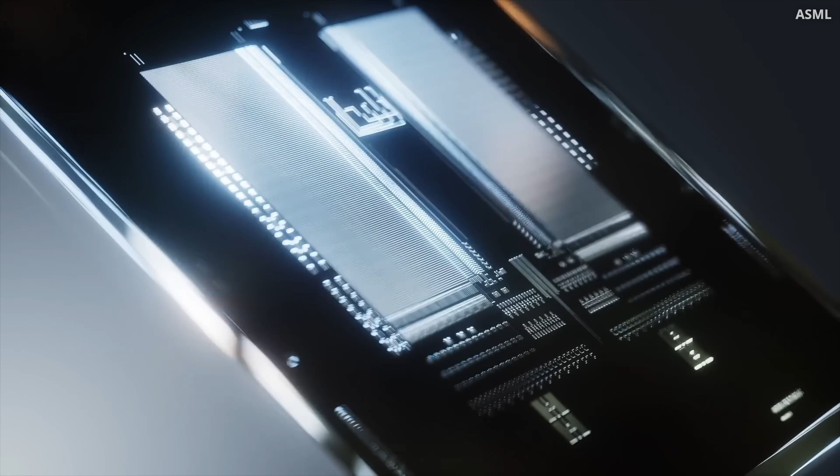There is a tectonic shift underway in chip making. One so big, it's not just about factories. It's about who controls the global economy itself. Let me show you. Just a few years ago, the Arizona desert was nothing but dust. Fast forward to today, and the same land holds America's most ambitious project.

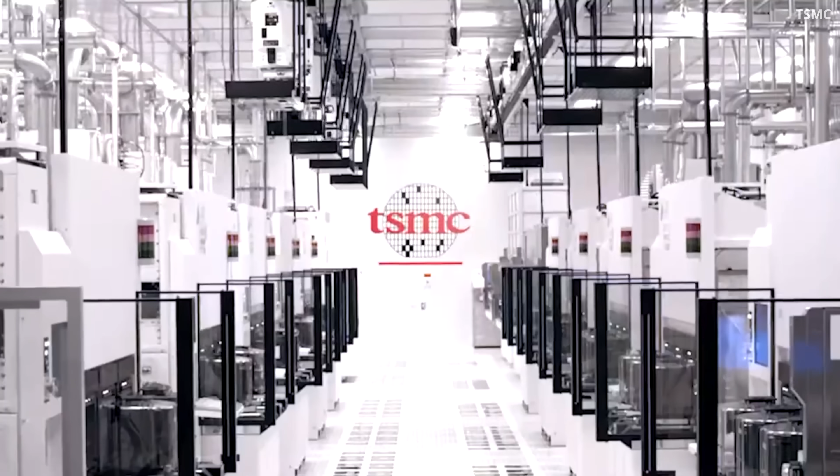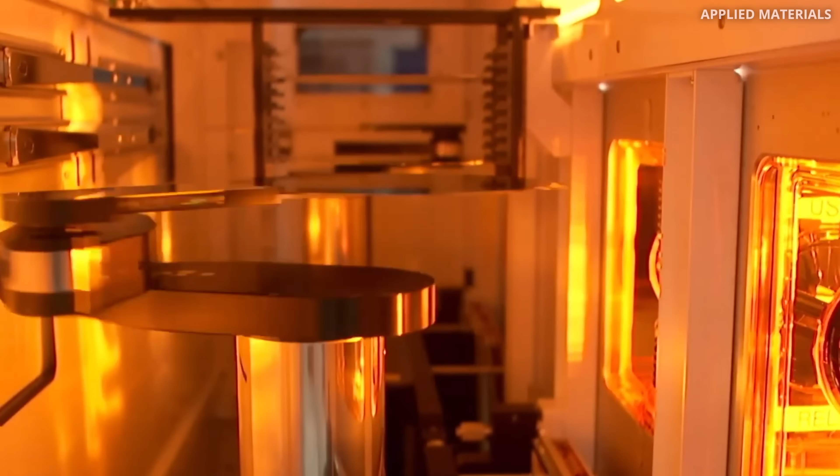TSMC's most advanced chip factory. A $165 billion bet on the future of microchips. There is a reason why TSMC chose Arizona. The desert offers one advantage Taiwan can't match: almost zero risk of natural disaster. And that stability matters when the stakes are that high.

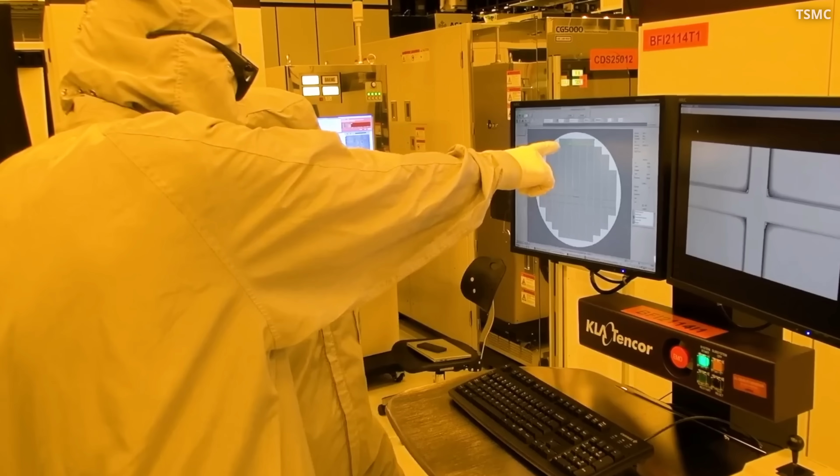The plan sounded simple. Just copy a semiconductor fab from Taiwan onto US soil. But this turned out to be way harder than anyone ever expected. In Arizona, TSMC ran straight into a sandstorm of problems. Because chip making at the nanometer scale isn't about construction. It's choreography: equipment, chemicals, and people moving in perfect lockstep. Get it right, and you are printing money. Miss just one step, and billions go up in smoke.

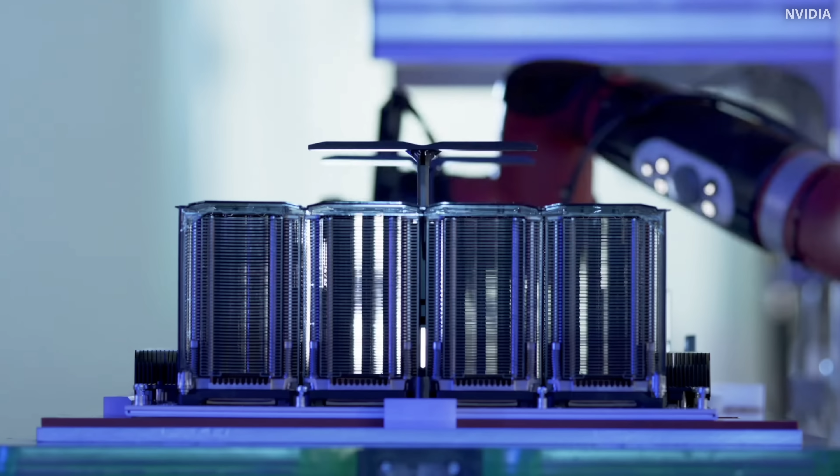And here is the irony. The US invented the semiconductor industry and still leads in design, equipment, and software for chip design. But manufacturing dominance slipped away. US share of chips fell from 40% in 1990 to about 10% today. Can TSMC bring advanced chip making back to the US?

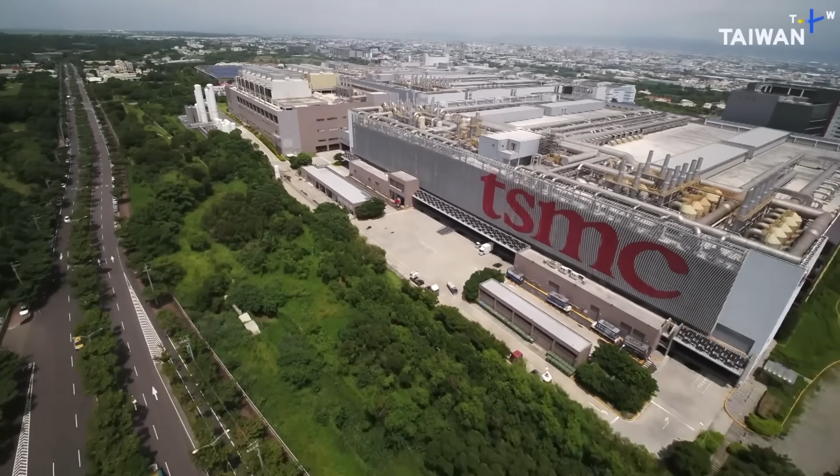On paper, the plan is simple. In reality, it's brutal. In Taiwan, TSMC can build a fab in just 2 years. In Arizona, every single step took at least twice as long. So, what happened? I've been working in the semiconductor industry for the last 10 years. And my main lesson is chip making is the art of killing variables.

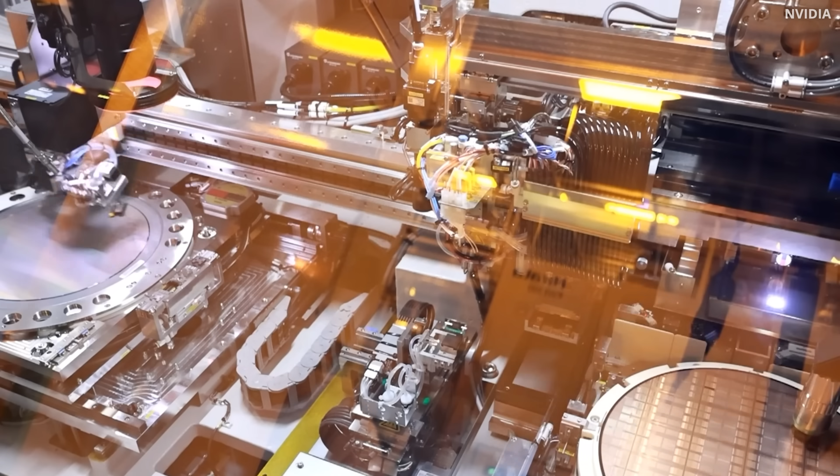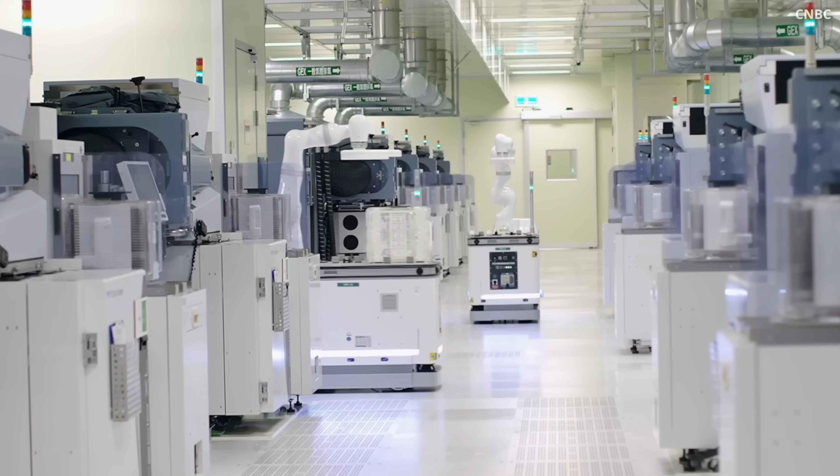Now, consider this. At the 4-nanometer process, there are hundreds of variables spread across 4,000 manufacturing steps. And here is the catch. Any of them can kill a chip. And variables don't behave the same in every place. In Taiwan, TSMC tuned the recipe for local water, air, power, suppliers, and even culture. Move the fab to Arizona, and all these variables shift.

Arizona is not known for water. Air is different, and most important, the culture is very different. Even the ground is different. Here, the ground is much drier, with rock-hard layers beneath. That gives it a higher natural frequency. Any of those shifts can throw off nanoscale precision, which is enough to kill an entire chip. Now multiply that across thousands of wafers, and suddenly production yield drops.

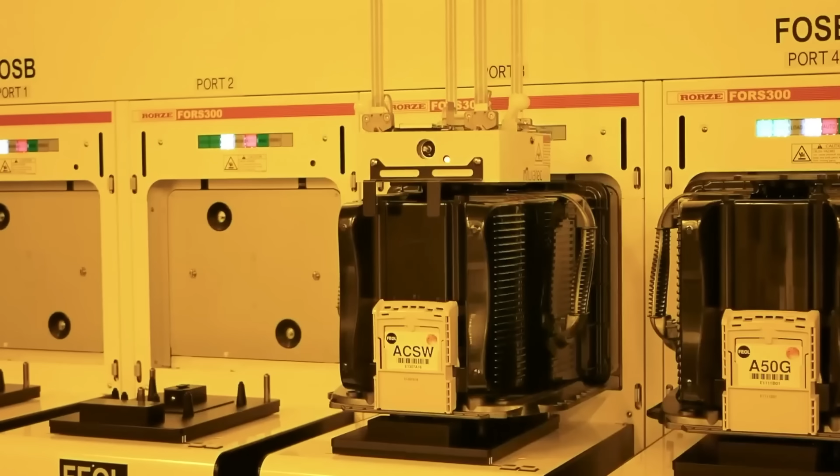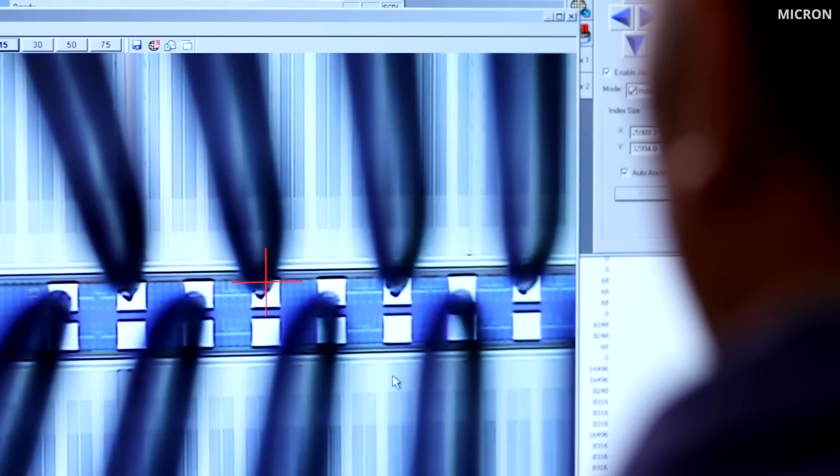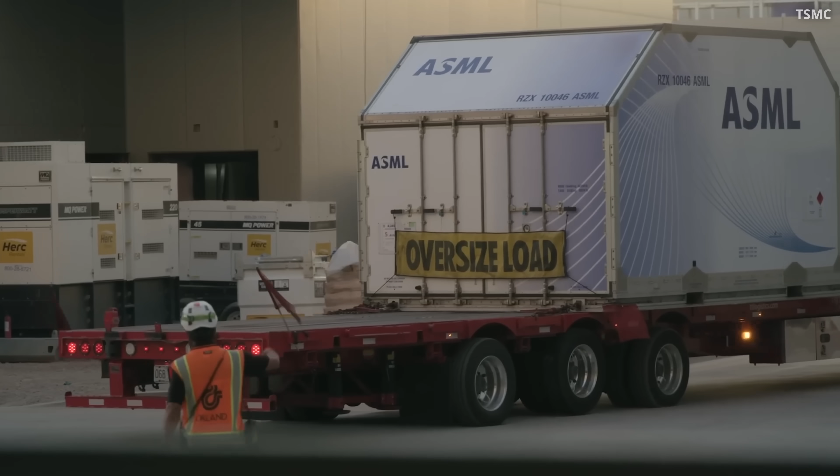Yield is critical. It's the percentage of chips per wafer that actually function. At 90% yield, like TSMC achieves in Taiwan, you're practically minting money. At 30%, you're bleeding cash. But in Arizona, instead of glory, there was chaos. Variables drifted. Dust storms breached clean rooms. Every system was pushed to its limits. Yield collapsed. The truth is, you can ship in equipment. You can even fly in engineers from Taiwan, but you cannot ship the context.

And here is a hidden truth. Each time you want to build a semiconductor factory, you're not just building one. In fact, you have to build 4 factories, 4 invisible factories inside. The first invisible factory inside the factory is the water plant. And in the desert, this is the hardest battle of all. You might be surprised, but at the bleeding edge, water matters as much as the famous EUV lithography machines. And that's the problem, because semiconductor manufacturing uses a lot of water.

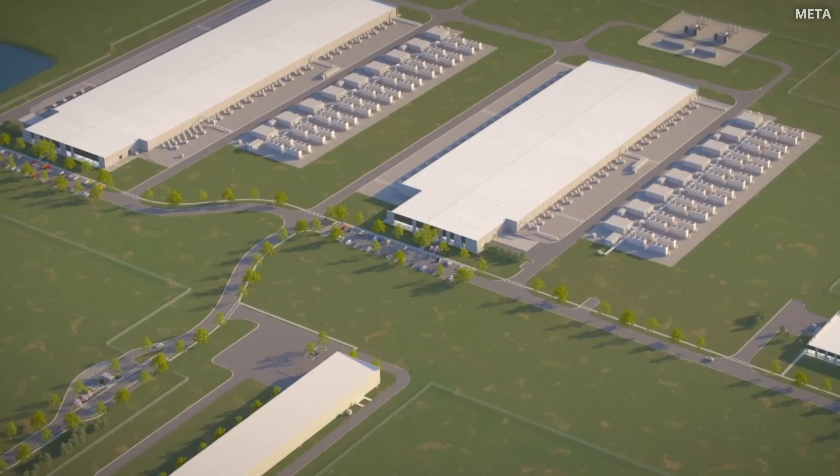While Arizona is one of the most water-stressed places on Earth, the state depends on the Colorado River, which is already stretched to its limit. At the same time, Arizona hosts more than 100 active data centers. And this includes massive data centers run by hyperscalers like Meta and Microsoft. These facilities consume enormous amounts of water for cooling.

The irony is brutal. Those same data centers burn a lot of energy, and power plants again use water to generate this energy. That electricity turns into heat inside the servers, which then require even more water to cool them. It's a feedback loop with heavy consequences. As you can see, the water situation there is already a nightmare. And now this new fab will attempt to draw on the same finite supply.

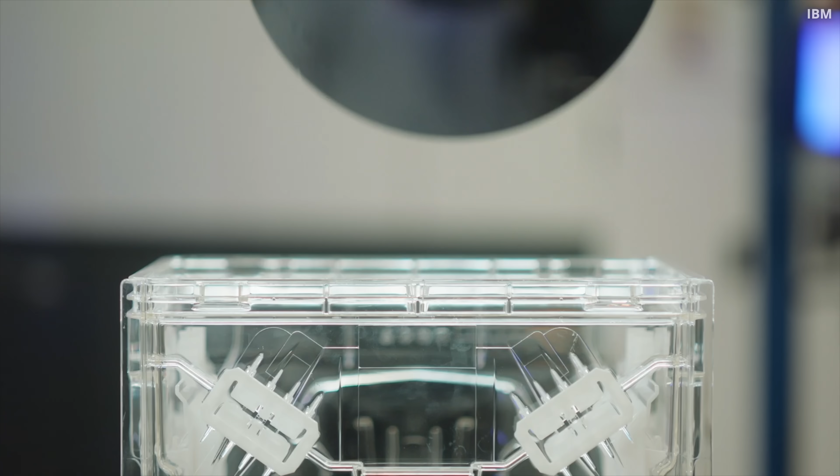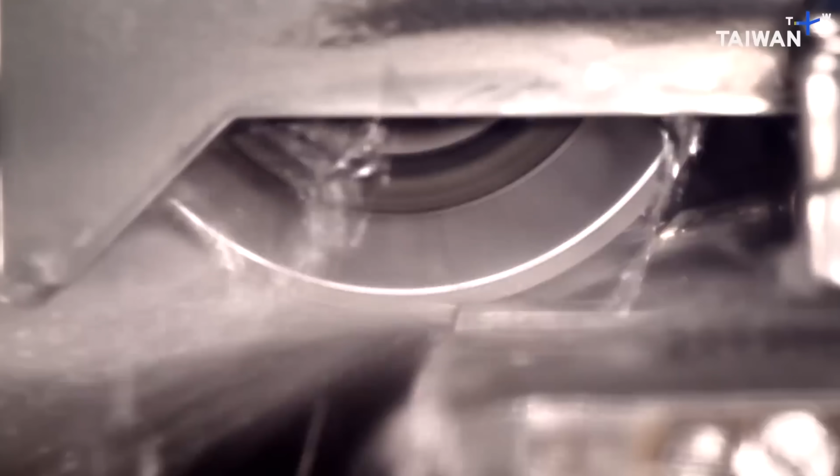But a semiconductor fab is not just thirsty for large quantities of water. It requires ultra-pure water. That's 1,000 times cleaner than drinking water, and even cleaner than the one used in medical injections. Because a single contaminant or particle can destroy a $30,000 wafer. Water is the backbone of semiconductor manufacturing. It touches nearly every step of the process. After etching, it rinses away acids. After photoresist, it strips away chemicals. Just imagine, even in immersion lithography, water sits between the lens and wafer, sharpening the image.

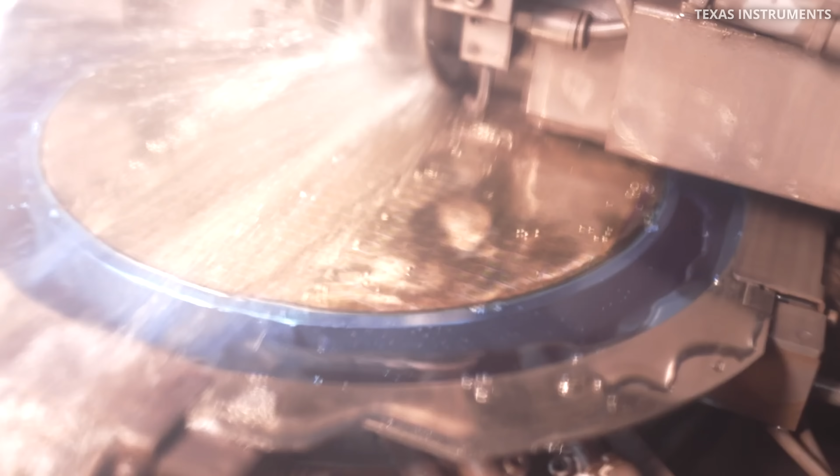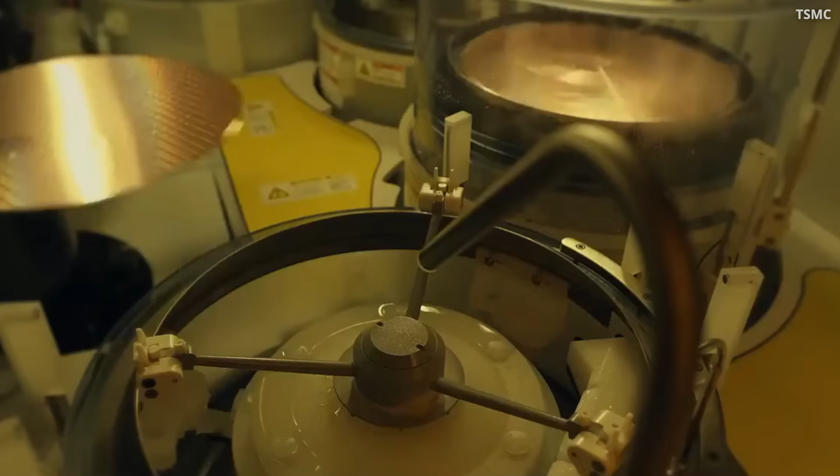And the amount of water used is quite shocking. Each and every silicon wafer drinks around 2,000 gallons of water across its lifetime. This means Fab 21 alone will consume more than 4 million gallons. That's about 6 Olympic swimming pools of water per day. In Taiwan, TSMC cracked this by building dedicated water plants, purifying and recycling every possible drop. But in Arizona, water is different, chemically different. It's full of magnesium and calcium. You can't just copy-paste the solution from Taiwan.

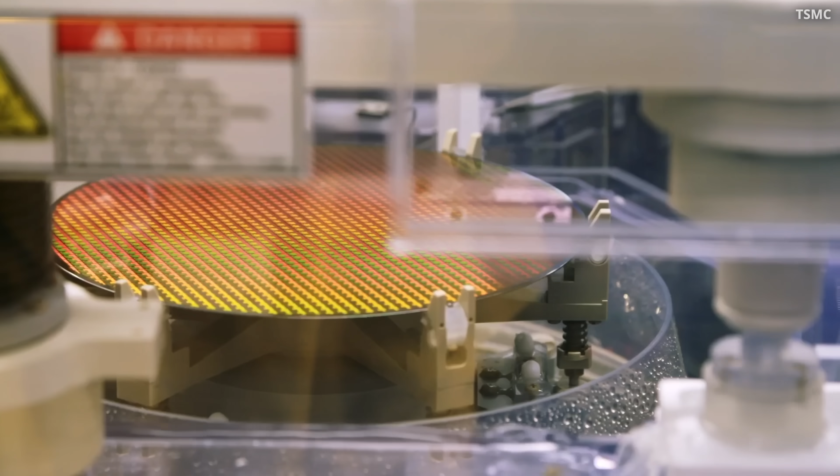So, how do you get that much pure water in the middle of the desert? The answer is hard. You don't just build a semiconductor fab. You have to build a dedicated water plant the size of a stadium. Inside, water flows through stage after stage: filtration, reverse osmosis, and deionization.

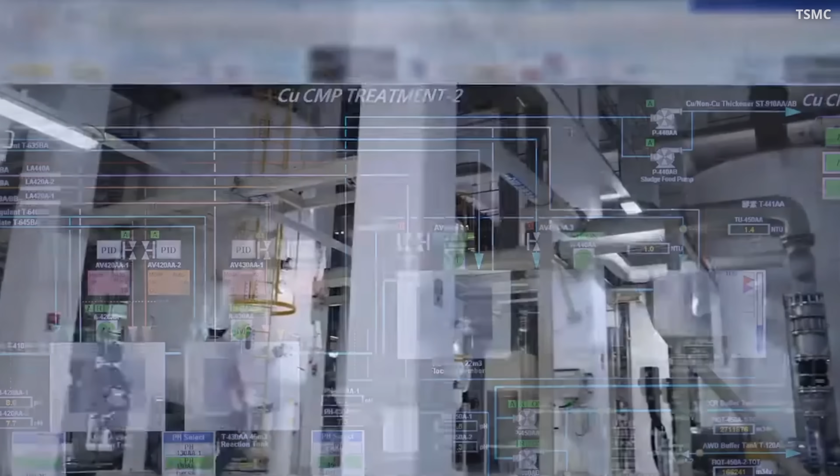And even after all of that, tiny impurities still remain. Then comes the final polishing. Resins and ultrafilters scrub out the last traces, leaving water so pure it exists only in a semiconductor fab. And TSMC had to rebuild this entire system for the unique chemistry of Arizona's water. What comes out is the purest water on Earth.

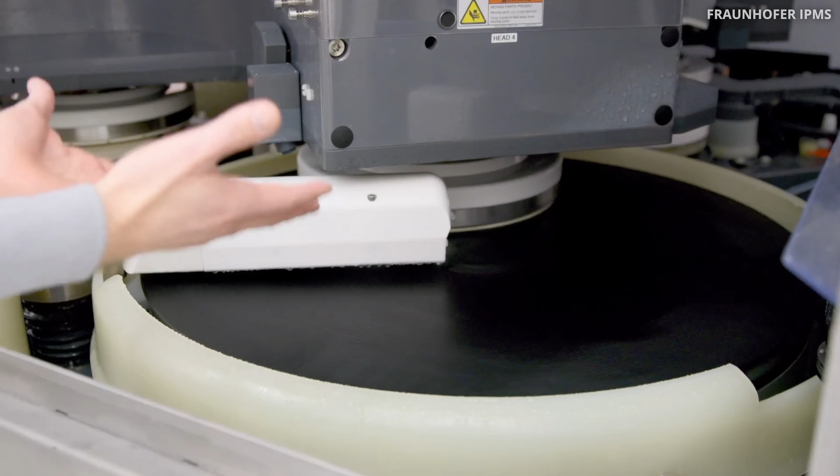And the genius of the water fab is that instead of dumping waste, the plant recycles it, making sure their hard-earned investment doesn't go down the drain. Literally. If, for some reason, it can't be reused again, it gets redirected into cooling. That's how Fab 21 reduces its draw on city water, while still feeding one of the most water-hungry fabs on the planet. Soon they realized water wasn't enough.

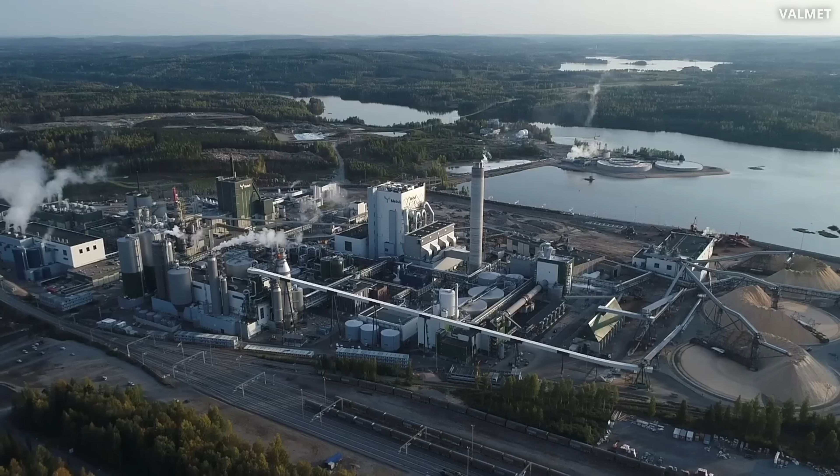Another critical cleanser in chip making is sulfuric acid, the quiet backbone of the fab. It strips photoresist, clears residues, and burns away any trace of contamination, so the next layer can stick. It's not glamorous, but without sulfuric acid, the fab stops cold. And not just any acid will do. Again, it has to be ultra pure.

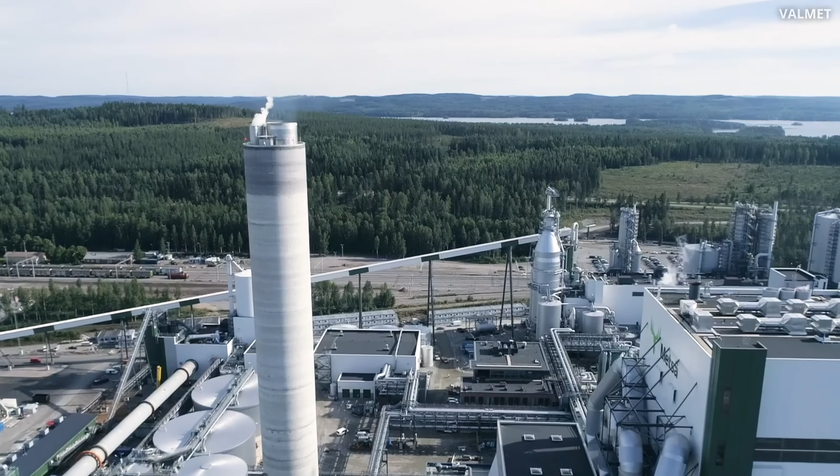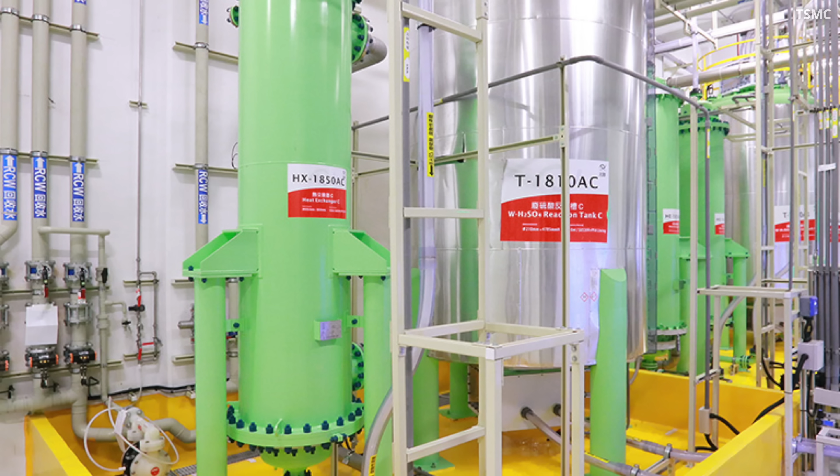And that's where Arizona hit the wall. US vendors were able to make clean acid, but local prices were nearly 5 times higher than in Taiwan. So TSMC had to ship it 6,500 miles from Taiwan. And as crazy as it sounds, it was still cheaper and more reliable than buying locally. Of course, that couldn't last forever. So the supply chain followed.

Sunlit, a Taiwanese chemical giant and one of the key TSMC partners, had to build a new plant in Phoenix. Again, not a copy-paste factory, but one attuned to Arizona-specific water and desert conditions. And that move was critical, because copying a fab means copying its suppliers too, and planting them next door.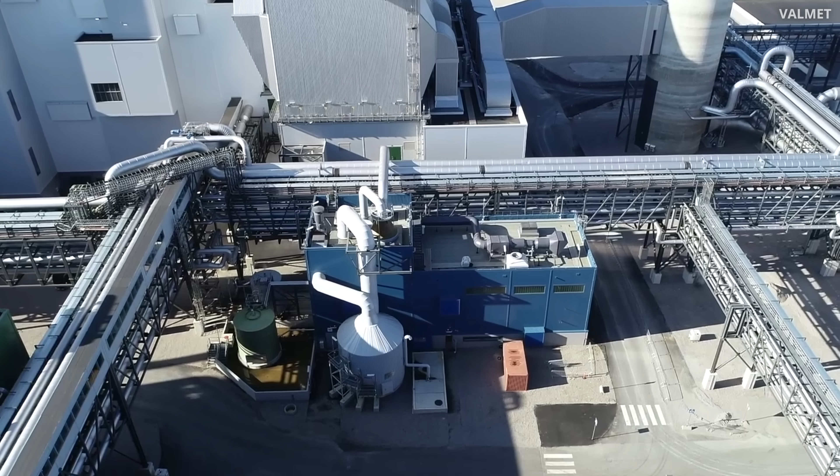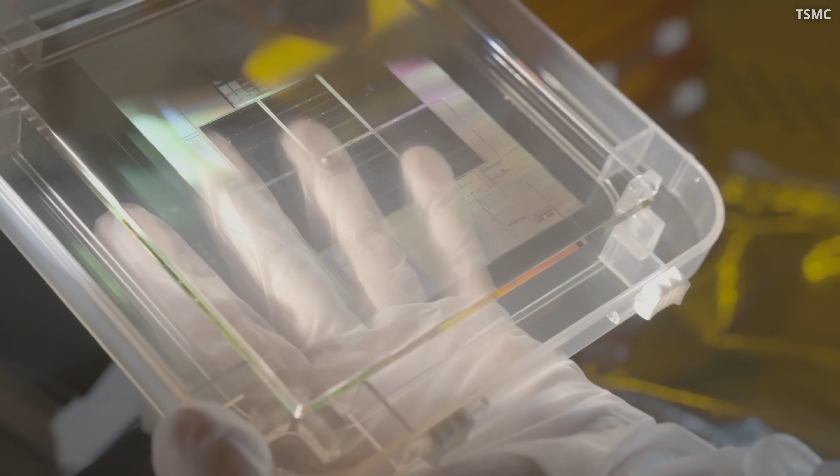If acid is a backbone, then gases are the lifeline of a fab. And not just oxygen or nitrogen, but gases like neon, rare and tough to source at the ultra-high purity chip making needs. Neon is critical for the lasers used in photolithography. It makes up about 95% of the gas mix inside deep ultraviolet tools that print chip patterns. EUV handles the most critical layers, but DUV still prints most of the stack. The fact is, DUV can't run without neon.

The catch here is, again, it has to be ultra pure. I know I said it already 3 times, but that's the truth of chip making. Everything has to be cleaner than clean. Even a trace of impurity destabilizes the laser, blurs the light, and seeds tiny defects that collapse the yield.

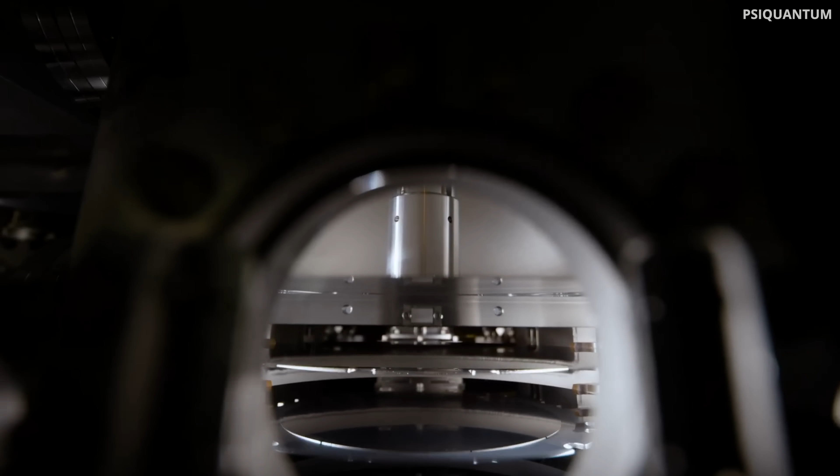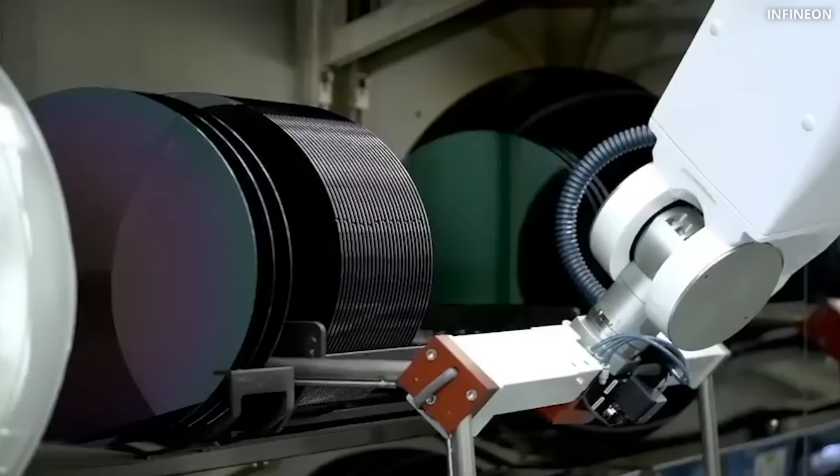And again, Arizona comes up empty. No local supply. For now, only a few essential gases used in chip making are produced locally in Fab 21. But most of these specialty gases are still imported from Taiwan, Japan, and Europe. That's the fragile truth. And even the silicon wafers themselves are still shipped from Taiwan and Japan. So, from the outside, Fab 21 looks American. But under the hood, it's still tied to a supply chain stretching thousands of miles across the oceans.

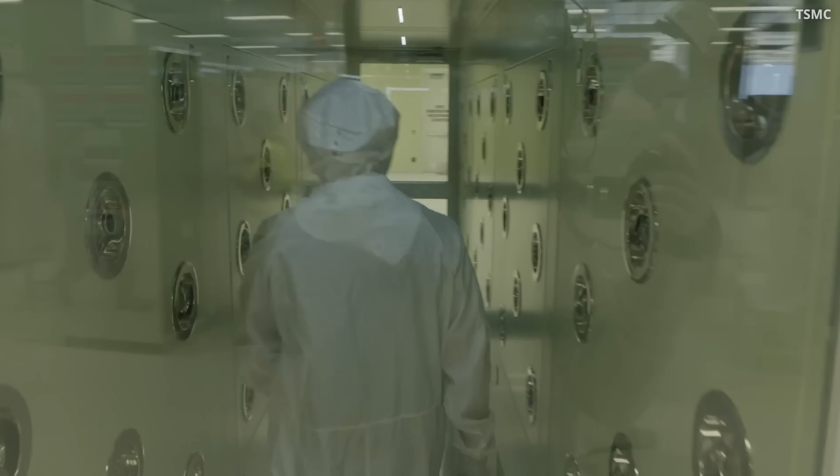Water is one challenge, but what about air? You might think, surely, Arizona has plenty of air, right? But that's the most fragile ingredient in the recipe. And once you get into a semiconductor fab, you will immediately realize why.

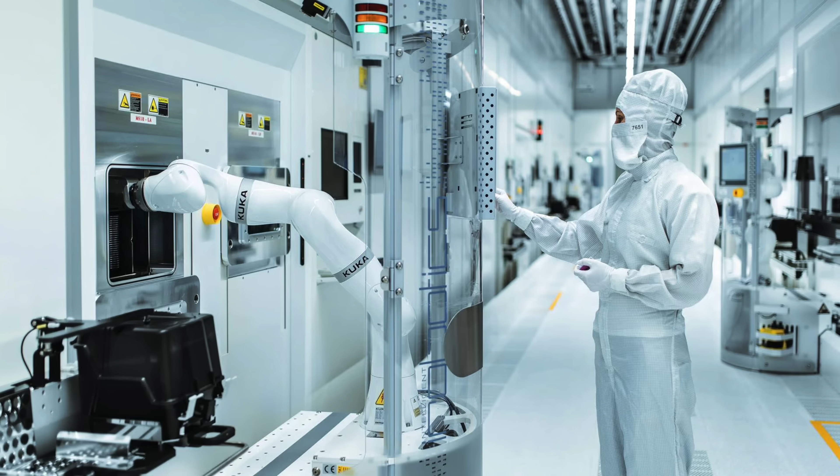Back when I was doing my master thesis, approximately a decade ago, I used to go inside the fab, inside the clean room, because there was something wrong going on with my chip and I had to go and watch the whole process to figure out what's going on. That's when I first saw how extreme these environments are, because the obsession with cleanliness is beyond imagination.

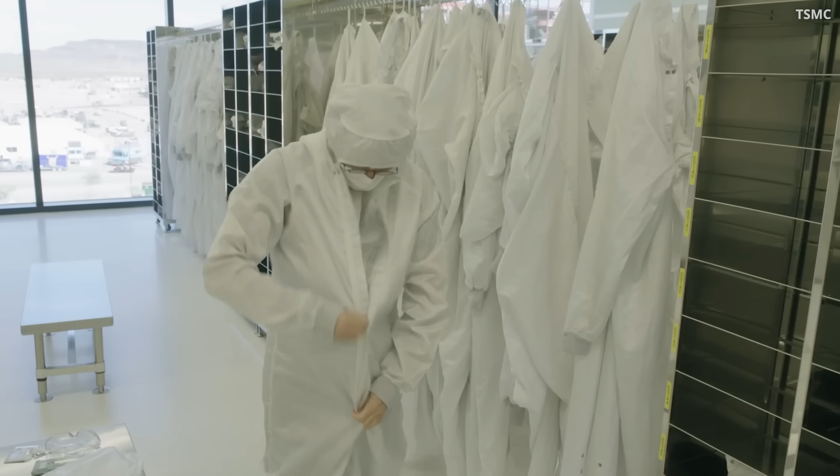Basically, you are wrapped head to toe in a clean room suit. The rules are absolute. Nothing escapes your body into the air. Even a single eyelash drifting onto a wafer can destroy weeks of progress. Clean rooms are the place where the chips really get their crunch.

Fab 21's clean room is enormous, about 160,000 square meters or up to 1.7 million square feet. By size alone, it ranks among the largest clean rooms ever built. But the bigger the room, the harder it is to keep it pure. And the Arizona desert makes it even tougher.

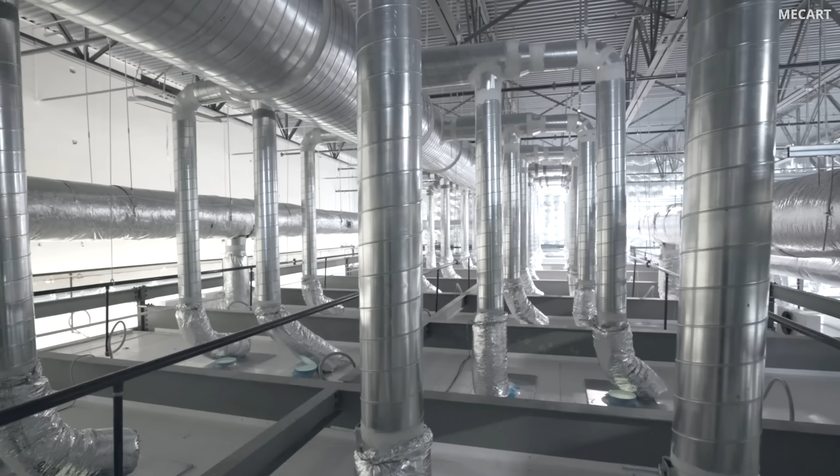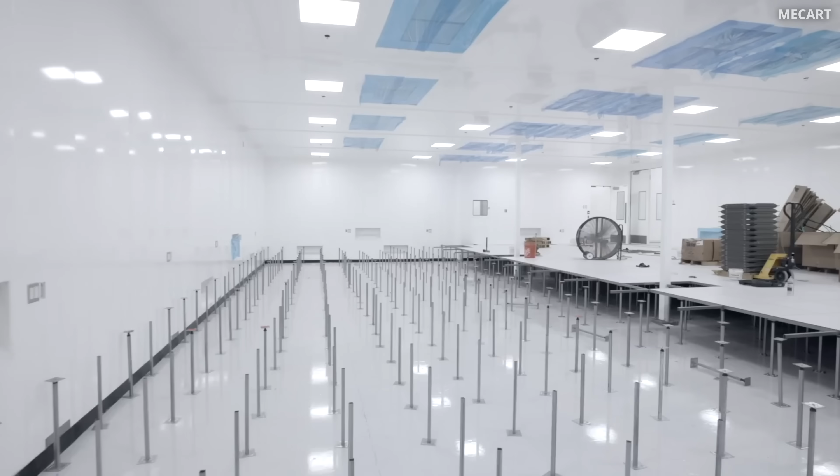Clean air is constantly pushed from the ceiling, flowing smoothly over the machines, then slipping through vents in the floor. And it's all about pressure, because the air pressure inside the clean room is kept slightly higher than outside. Dust and particles from the desert can never be permitted to leak in. TSMC flew in teams from Taiwan to fine-tune airflow until it was perfect.

Just imagine, outside there are thousands of particles, while inside the fab, inside the clean room, it can never rise above 10 particles per cubic meter. It's fascinating because the fab literally breathes outwards and pushes the desert away. And once the air is finally under control, the next challenge begins.

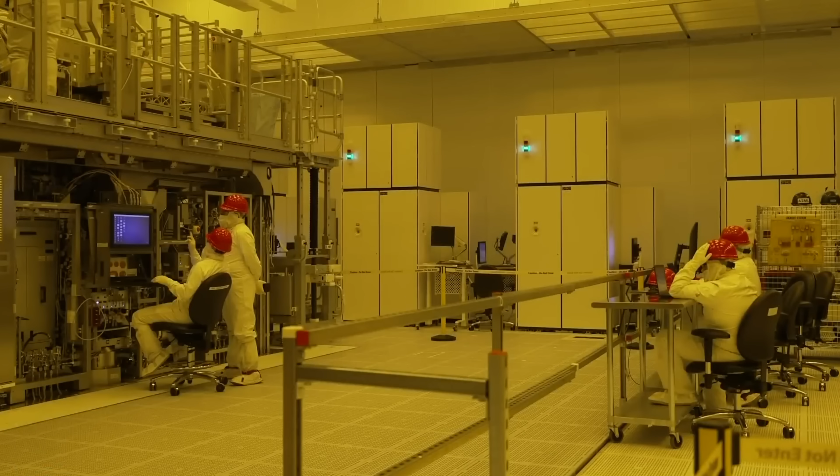The tools arrive. And this is where the real money shows up. 70% of a fab's cost isn't concrete or clean rooms. It's the machines. Billions of dollars worth of tools, packed wall to wall. And this is an area that really plays to America's strength. Companies like Applied Materials, Lam Research, and KLA cover most of the critical steps in chip making. Getting that equipment to Arizona was the easy part.

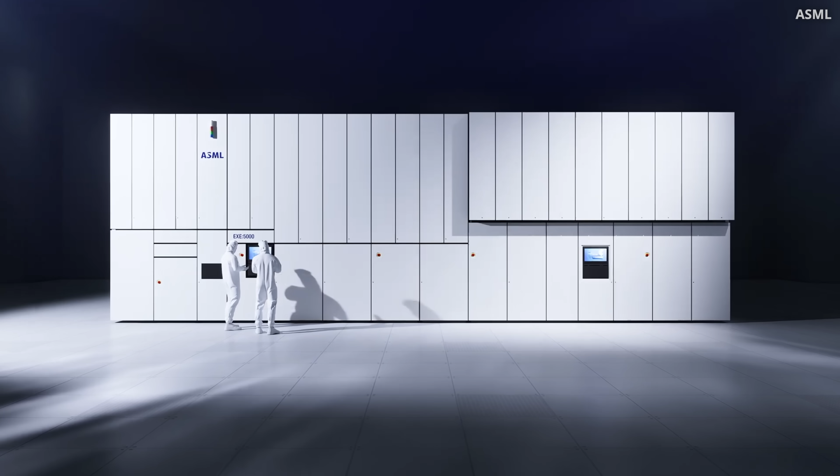But one thing the US doesn't have is lithography. The most advanced tools, EUV and DUV scanners that print chip patterns on the wafers, come from ASML in the Netherlands. Without these tools, no fab, not even TSMC, can print chips at 5, 3, or 2 nanometers. The United States leads in etch, deposition, process control, but they still have to import EUV machines from Europe.

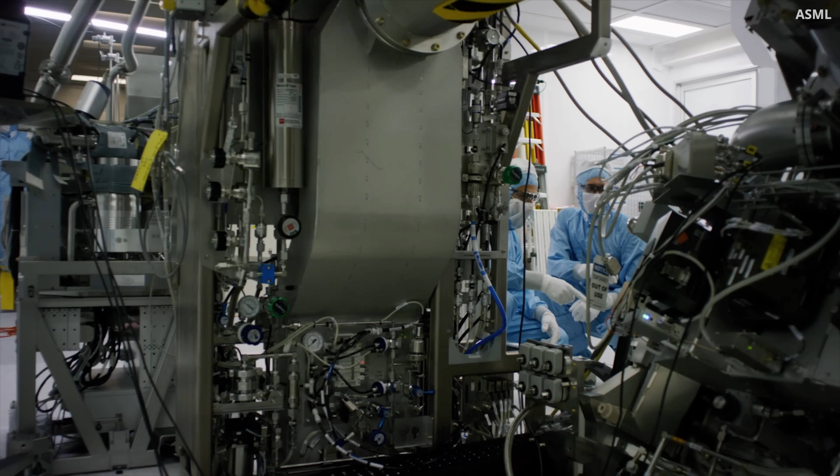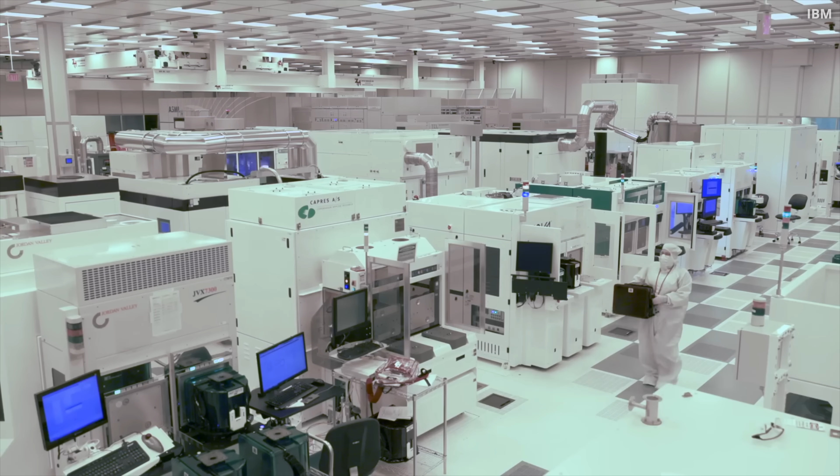Moving these machines into the fab is a stressful process, because if you tilt a component even slightly or drop a part, the precision is ruined. Importing and installing EUV machines is a stressful job. Just one mistake, and the fab goes dark before it even starts. TSMC's Fab 21 needs not one, but dozens of machines worth $150 million each just to get started.

And once it's all in place, you realize something else. Actually, building a fab was the easy part. The real challenge is what comes next. Getting these machines to work together seamlessly, flawlessly, to carve the tiniest transistor features into silicon. This is pure art. Imagine it's like conducting an orchestra where every single instrument costs $150 million and plays at the scale of atoms. Here, the real battle for yield begins, because the fab doesn't make any money before the wafer comes out clean from defects.

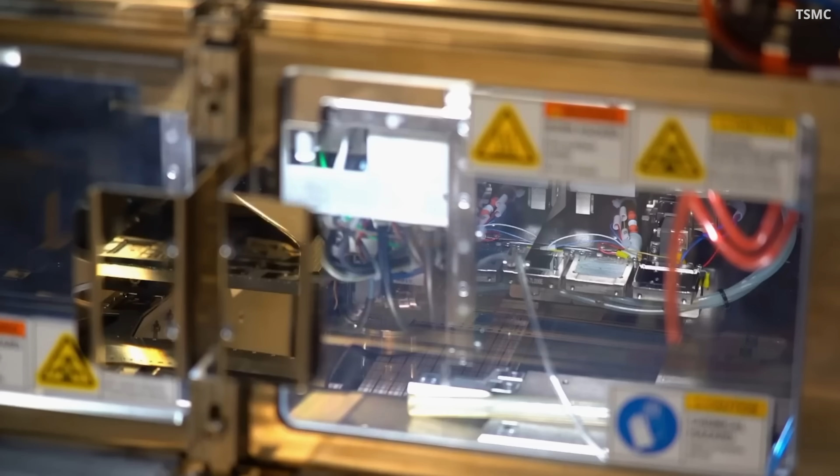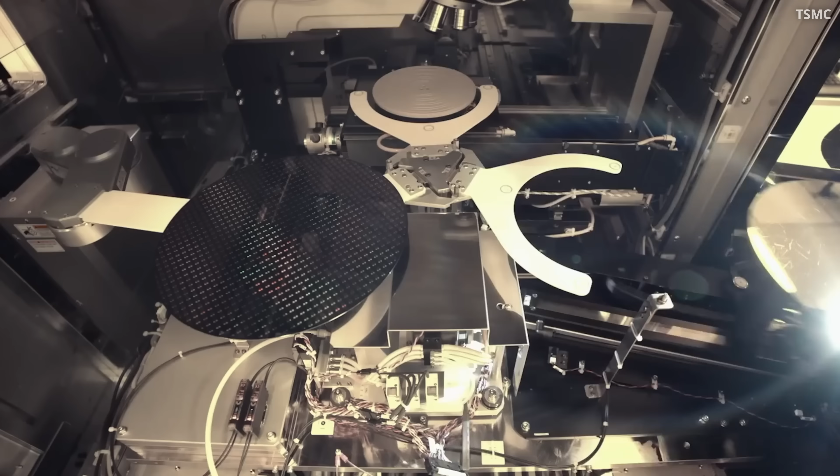And the first wafers never do. The equipment is new. The process steps are new in the new environment. So engineers, operators, and even tool vendors work together day and night, tuning, adjusting each of the 4,000 steps it takes to build a modern computer chip. And the scale is brutal. At 4 nanometers, a single wafer stacks more than 80 layers across 4,000 process steps. It takes months and thousands of tweaks before the first wafer finally comes out right.

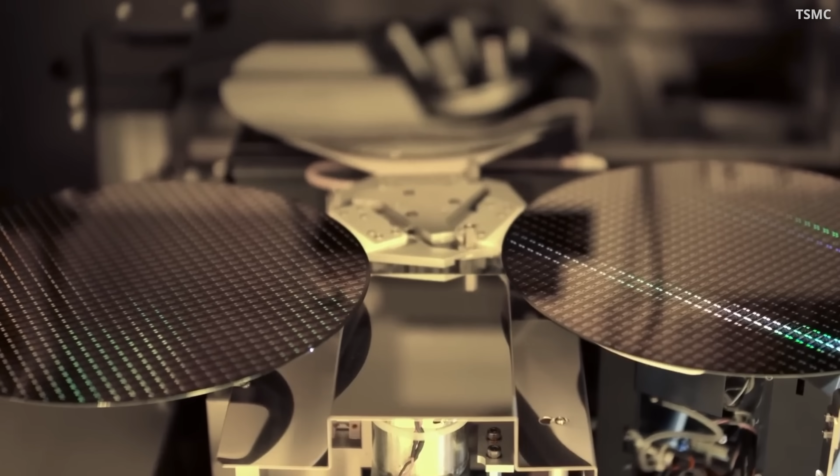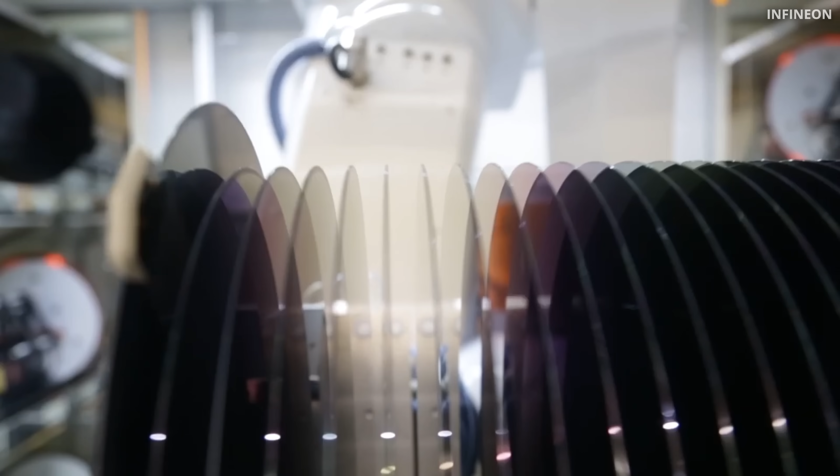This is the first 4 nanometer wafer manufactured at Fab 21 in Arizona. The most advanced silicon wafer ever made on US soil. It's progress, but that only happened after going through a lot of pain. Output is still low, covering only about 7% of the US demand. And costs in Arizona are at least 50% higher than in Taiwan. Why? Because almost all raw materials, from chemicals to wafers, are still shipped in from abroad.

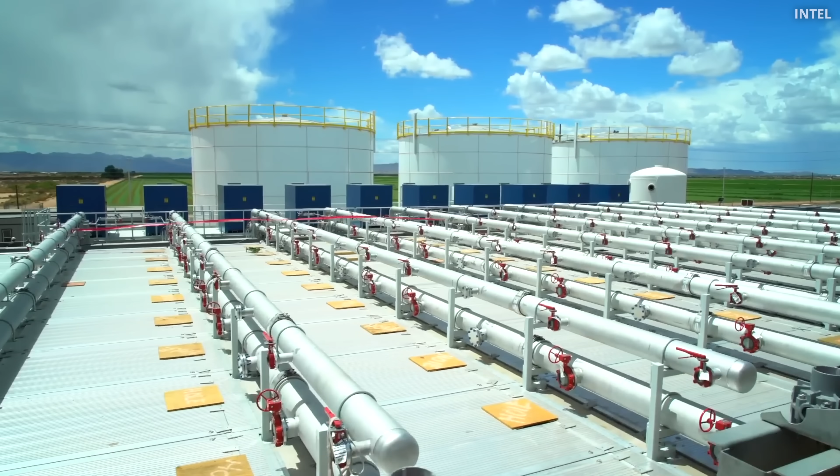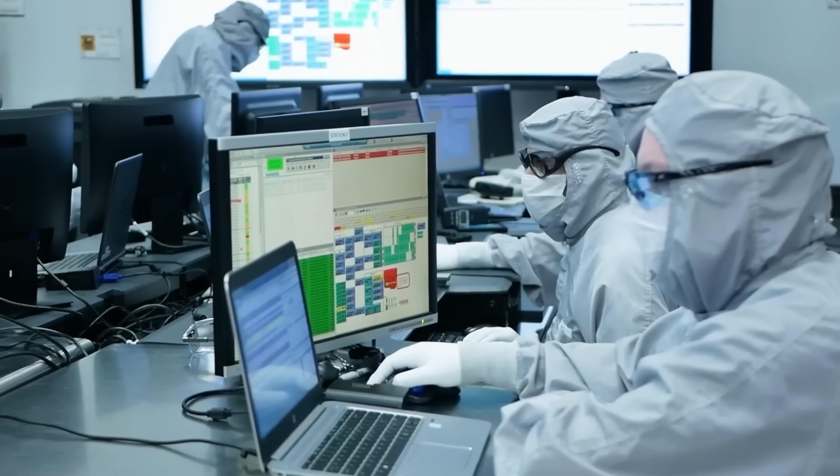And that's quite surprising, because Intel's most advanced fab, Fab 42, has been sitting just 30 minutes away for more than a decade. Yet most of its materials still come from abroad. Now, TSMC is trying to rebuild the entire supply chain here locally in Arizona. And in the desert, engineering talent is even scarcer than water. Taiwan's real advantage isn't just fabs, it's people. Generations of engineers trained in the rituals of chip making.

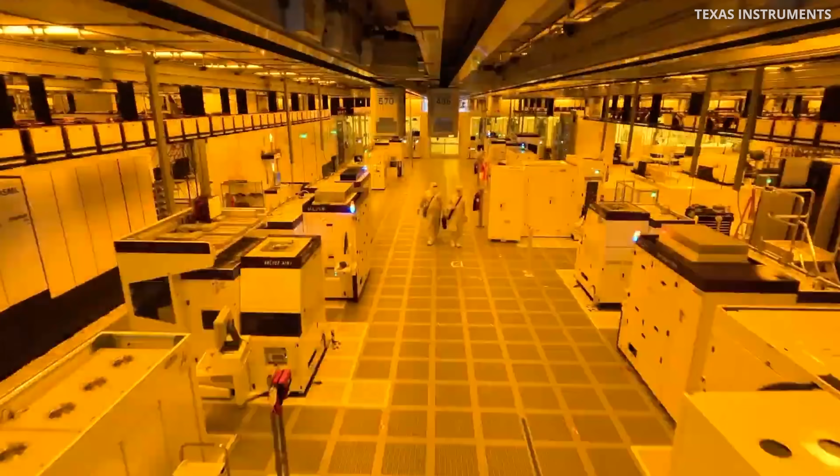But here is the harsh truth. Why it is in fact so hard to build a semiconductor fab. Because yes, you need machines and chemicals and an ecosystem, but the breakthroughs don't come from machines. They come from people. This is the invisible web that holds it all together. Engineers who know how to fine-tune every process. Suppliers who can deliver pure chemicals on time. And service teams who can bring a $150 million EUV machine back to life at 3 a.m. without stopping the line. In Taiwan, this skill set has been built over decades.

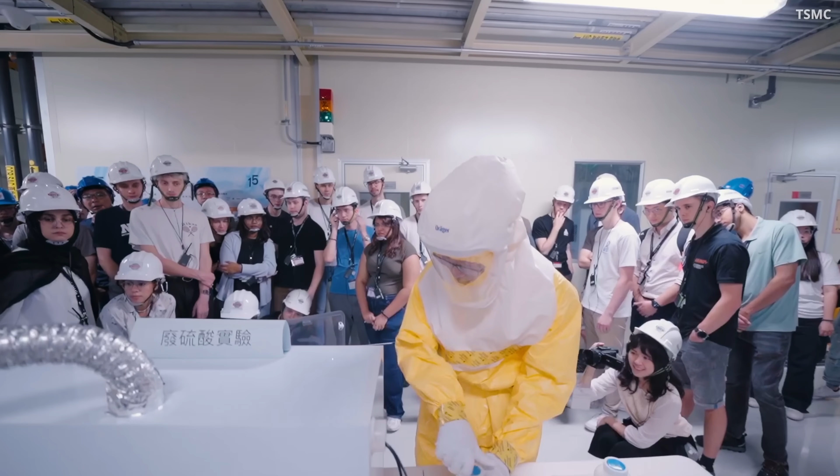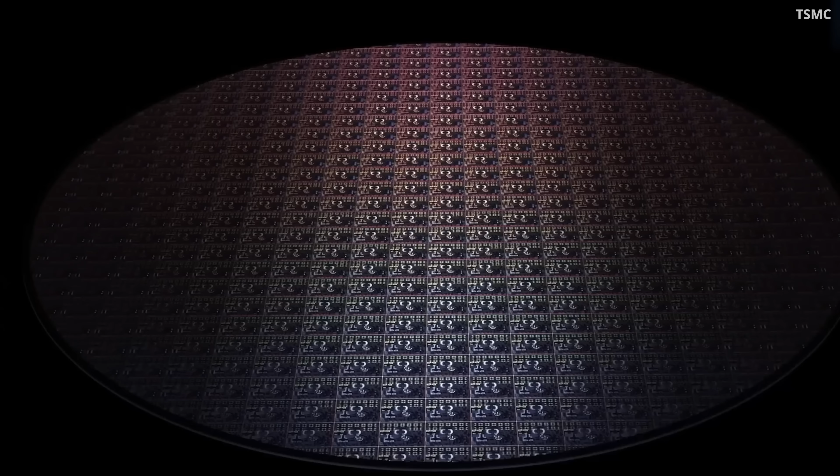Arizona had none of that. So they started to fix this gap. Local colleges started to create semiconductor programs. TSMC started to send engineers to Taiwan to give them the opportunity to absorb the culture of extreme precision. Because chip making at the bleeding edge isn't just knowledge, it's a habit, muscle memory, and slowly yield began to climb. By January this year, Fab 21 finally reached mass production of 4-nanometer chips, with yields now reported as comparable to TSMC's fabs in Taiwan. That means this complex choreography is finally clicking.

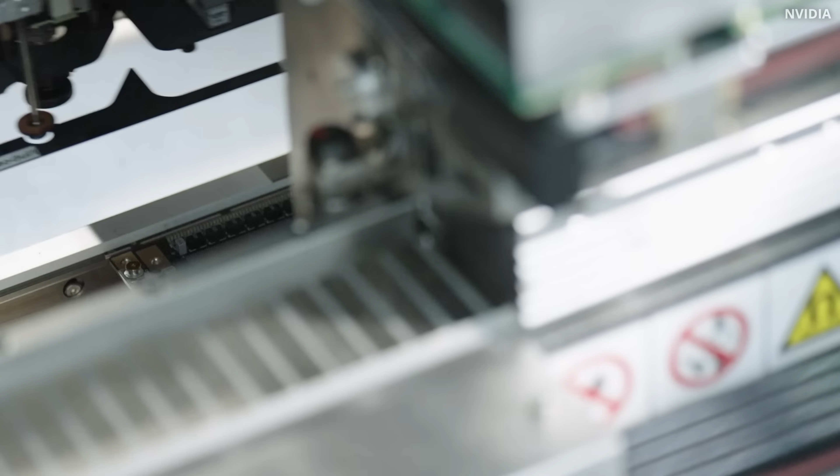Water, air, wafers, assets, tools, and even people all moving together in perfect sync. This is a true milestone. By 2028, this fab is set to grow to a mega fab, cranking out 100,000 wafers a month. For the first time in decades, America is able to produce bleeding-edge logic chips built domestically.

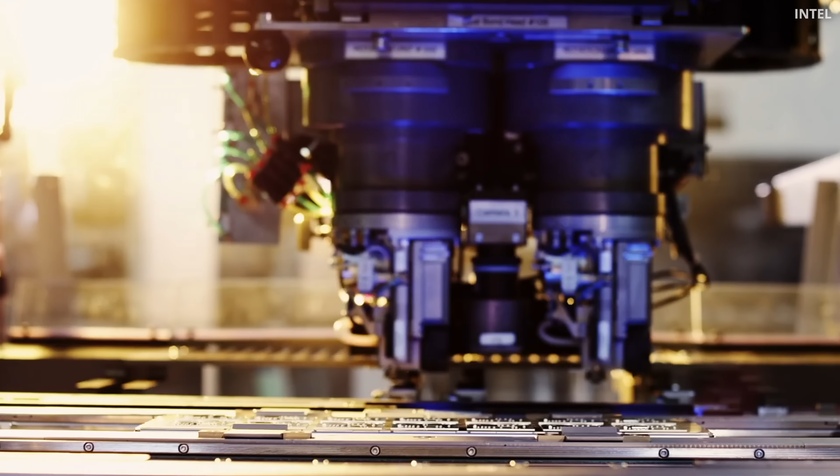It's a breakthrough and a warning at the same time. You saw it yourself. These chips are expensive and still dependent on a long supply chain. Output is still a fraction of what is produced in Taiwan. And packaging still flies across the Pacific, because chips like NVIDIA GPUs, which are built in Fab 21, are literally sent back to Taiwan for the final assembly.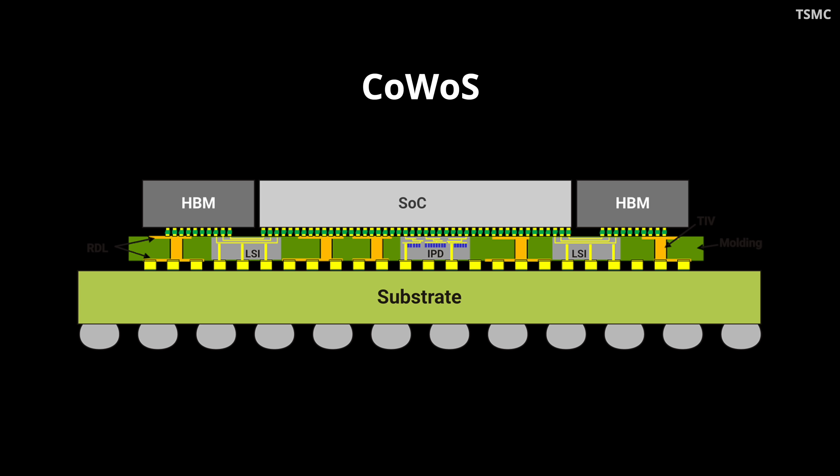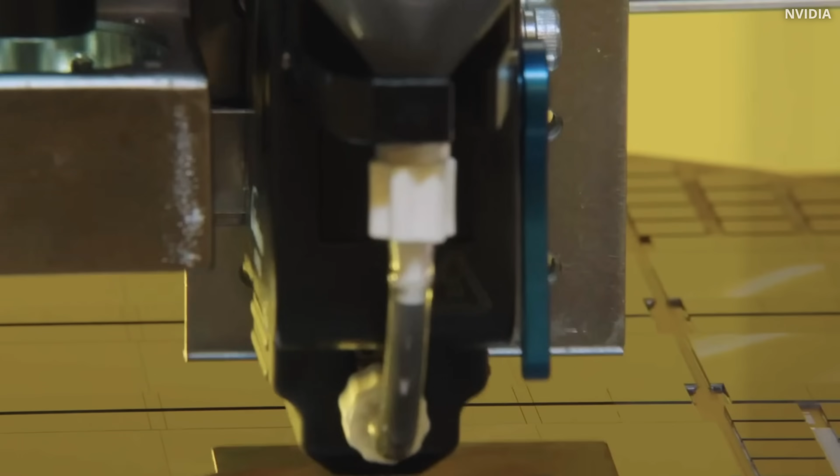The reason is simple. The US doesn't have advanced packaging capacity yet, especially for chip-on-wafer-on-substrate packaging. And this one is critical, because it allows you to place multiple dies side by side on a single interposer, basically allowing you to put high bandwidth memory right next to the GPU cores. That's why every NVIDIA GPU, including the new Blackwell GPU, depends on it. And for now, this packaging can only be done in Taiwan. The long-term goal is eventually to bring this packaging in-house on American soil.

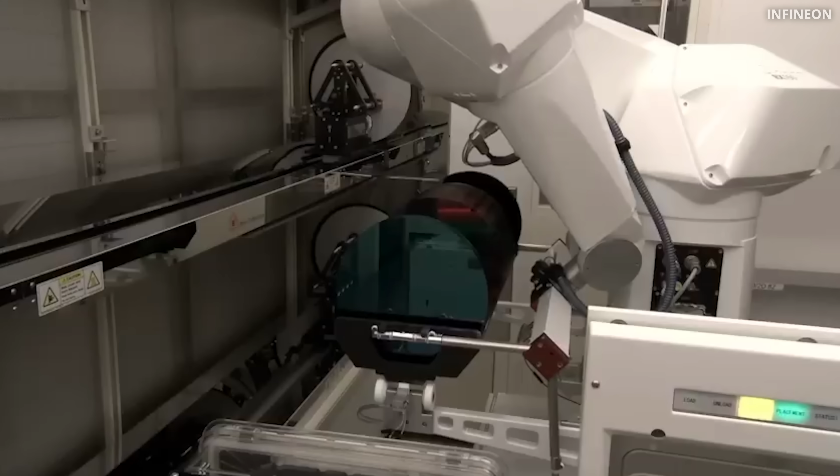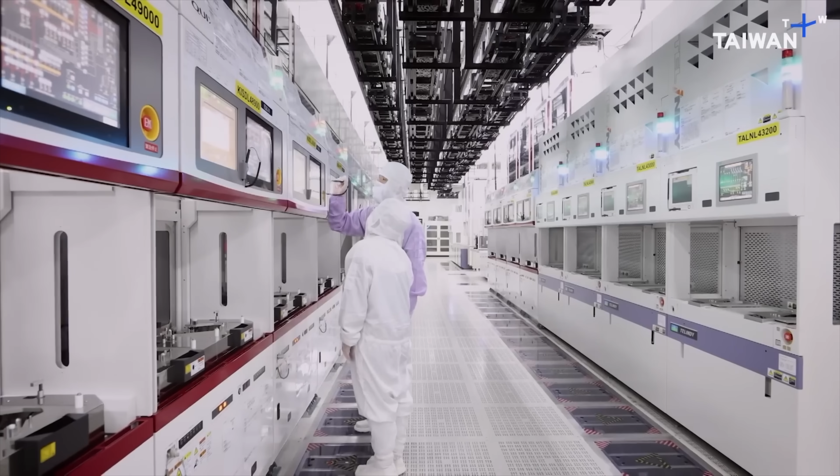The biggest challenge of Fab 21 is that it will always be behind Taiwan by 1 or 2 process nodes. And the logic is simple. Taiwan develops, Arizona inherits. Every new process node, let's say 1.6 nanometers, starts in Taiwan. The R&D center runs the pilot line, often with yields below 30%. Then the work shifts to the mother fab, where yields are pushed up and the process is stabilized. Only once it's mature, they transfer it overseas.

That means Fab 21 won't invent new nodes, but it will take on the critical ramp-up. This model lets TSMC expand globally without losing efficiency. But the goal is even bigger, to eventually build a mother fab in the US as well. And it's impressive that despite all these challenges, TSMC still pushed through.

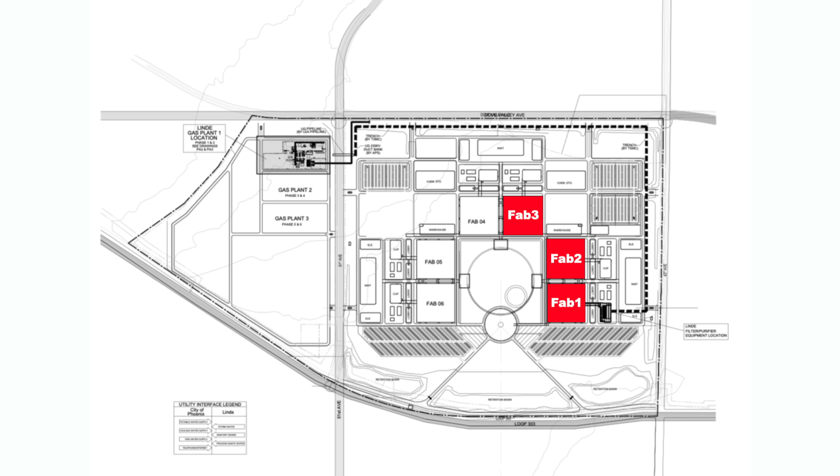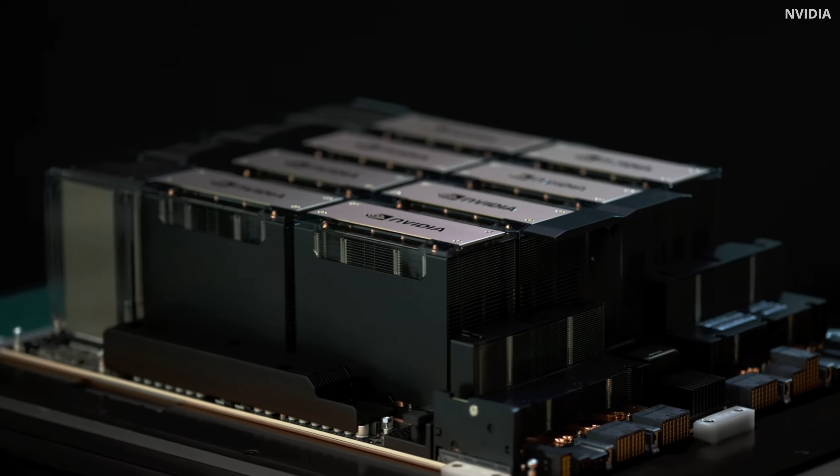The 1,100-acre site is designed for up to 6 fabs. 3 are already underway, alongside 2 advanced packaging facilities and an R&D center. Together, they will form the start of a full semiconductor ecosystem right here in the desert. The first fab, Phase 1, is already ramping up the production of NVIDIA and Apple chips. Phase 2 and Phase 3 are planned for 2026, targeting the next generation 3nm and 2nm process nodes.

But Fab 21 isn't enough. We need more fabs, more scale, more engineering talent. And that's why I think Intel matters so much. Intel Foundry isn't just another business unit. It's the most important part of Intel, and it carries massive strategic value for the United States. What is interesting, Intel's Fab 42 is actually 25 miles away from this new TSMC fab.

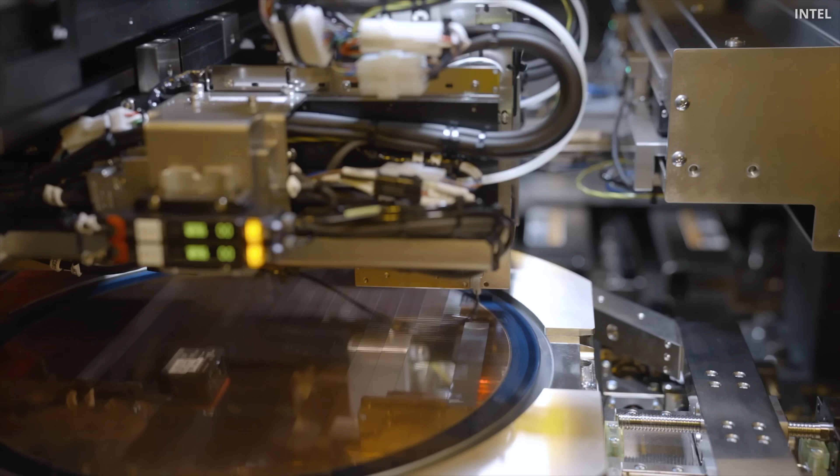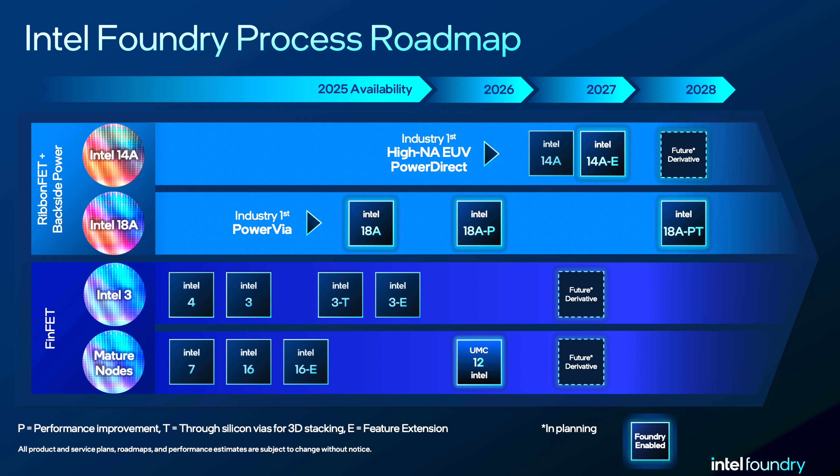Today, it manufactures 10nm class technology, and it is set to ramp up the production of Intel 7 and Intel 4 nodes. But the bigger play is what comes next. Intel 18A, which is designed to compete with TSMC's A16. Both of them will use the new gate-all-around transistor architecture and backside power delivery.

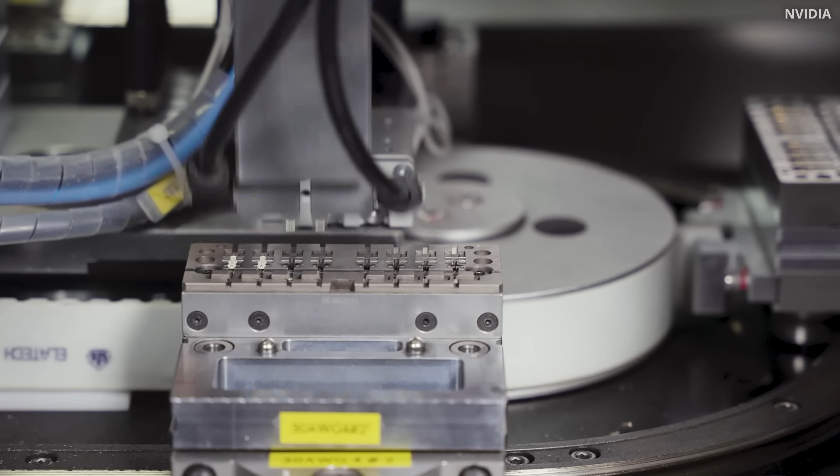You can see now why Intel has struggled. One of the reasons, on top of everything we've discussed, is that fabs are just too expensive, and this financial gravity pulled everyone else out of this tough race. For a foundry to be profitable, you need massive wafer volume just to pay off the billions invested. At the bleeding edge, only TSMC and Samsung have the capital and scale to make the economics work. Will Intel be able to catch up?

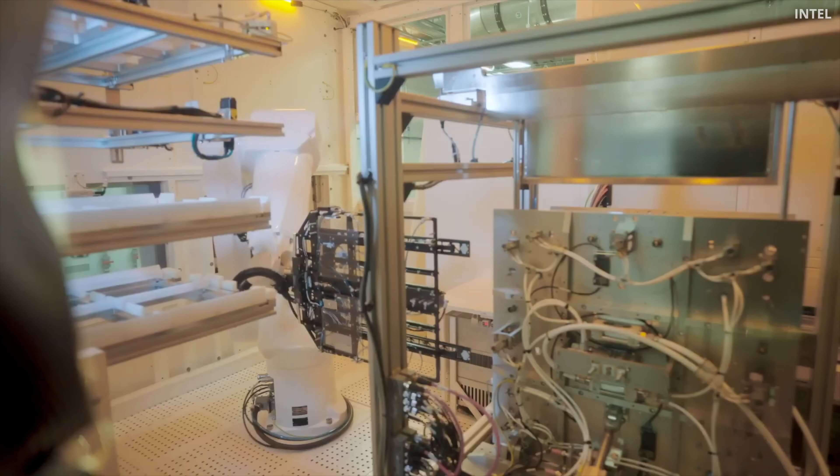Only time will tell. For the US, the CHIPS Act is just the beginning. To really compete, they need to streamline approvals, so fabs don't take a decade to build. And most importantly, they have to support semiconductor startups. After all, it was Silicon Valley startups that created the whole modern semiconductor industry.

And the next step is to fix the talent pipeline, meaning inspire new talent and build this whole cultural prestige around semiconductors. This was actually the mission of my channel from the very beginning. Back then, nobody was talking about semiconductors, and as a chip designer, my goal was, and still is, to bring more young talent into the industry so we can push it forward together.

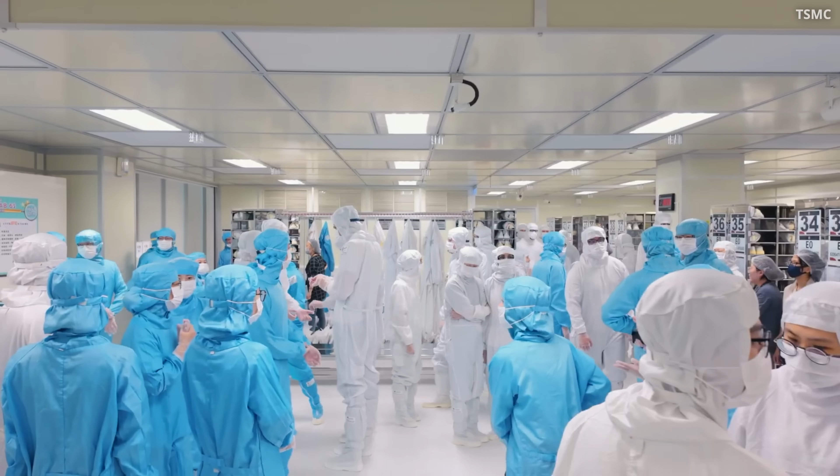Fab 21 proves something very important. It proves that you can't just copy a semiconductor fab. You need to build 4 custom factories in one. A factory for water, a factory for air, a factory for tools, and a factory for people. And then even a factory for power, which we haven't discussed yet. Get one wrong, just a little bit, and the whole system collapses.

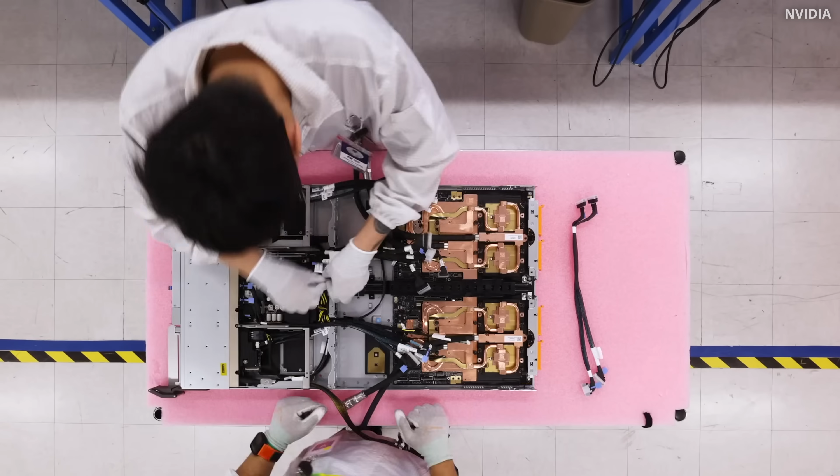And Arizona showed just how brutal this can be. This time, TSMC has given America a foothold. Will they be able to turn it into a powerhouse? We will find out soon.